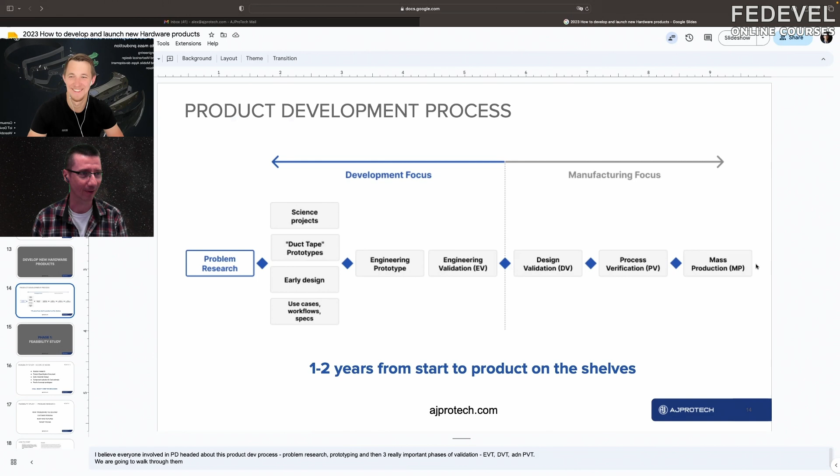Okay, so let's have a closer look on this point. Let's start with how you start. So once you're early in the process, you start with problem research. What problem are you solving? What existing components or products are already solving that problem, and how do they do it? You look at the pricing. You really want to dive into competitors before you start engineering, so you understand who you're up against.

Next phase is really critical. I think the most critical part in the entire process is to have a real clear product specification document. It's a requirement sheet outlining everything about your product that you need to know. This is going to be a live document which will be evolving, but at the end, your product must comply with that PRD. I have a few templates which we can share in the next few slides, so just keep that in mind—your PRD should be there.

If I can just say what's the difference between the successful launches and the not successful ones, those who made it usually had the requirements built from the start.

So basically, I would like to point out your company also does this complete design and manufacturing process. So when you have clients, they will deliver to you this kind of document, and based on these documents, you then design all the boards and everything.

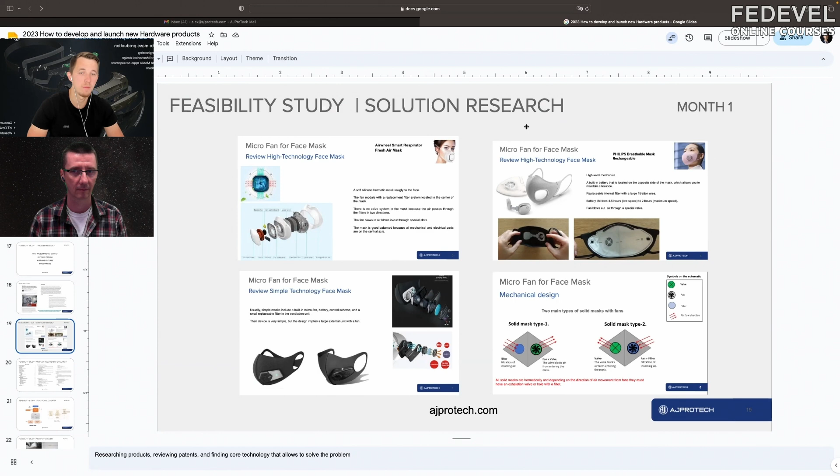When you research solutions for similar products, you'll see the must-haves that competitors have—certain battery life, certain pricing. So you do your research before building your specs, then start working on specification. A good specification depends on product size—for something really big, it can be up to 20 pages; for something relatively small like a consumer electronic product, it's usually around 5 pages. Don't try to make it perfect, it won't be in any way—somewhere between 2 and 5 pages is a good starting point.

You have to define what the must-haves are for you, and those must-haves must keep evolving—you might be adding to them. For example, temperature range and humidity are important. If you have certain functionality requests, for example a product with connectivity, you might want to include how often it needs to send data to your mobile device through Bluetooth. Battery life is also important.

So here, you don't think about how to get it, you think about what you need to get. So solutions—it's not going to be super detailed. It doesn't go into component stuff or something. Just the features and really important requirements.

Better than what is already available. You definitely don't want to be worse. You want to be better. Okay, that is correct. What comes first?

Solution comes second. Here you just define what you need to get, and you come to the how to get, to the specs, at the next phase when you select components and start making prototypes. Don't try to use this accelerometer or this microprocessor in the specs, because that's a path where you restrain yourself too early. Okay, and this is the PRD, product requirement document, because you used this a couple of times, so I wasn't sure what it means.

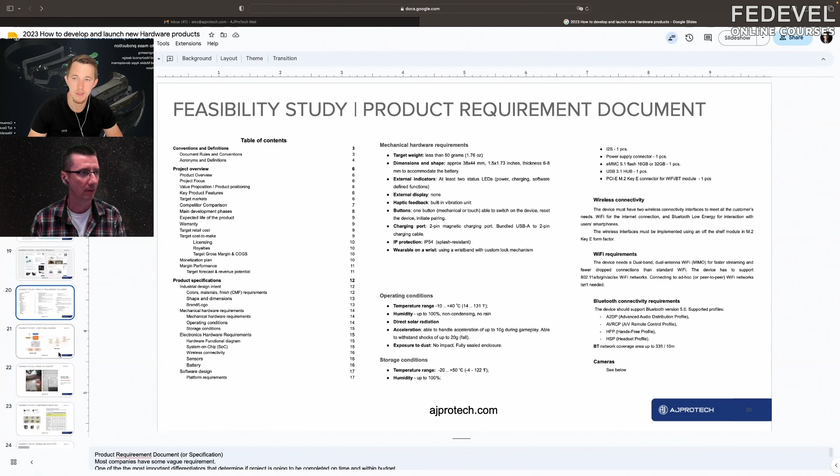Okay, yes. So one of the next phases is when you start experimenting with development kits, getting those evaluation boards. My biggest recommendation, and don't quote me here, but we're highly against using regular hobby prototyping things like Arduino or Raspberry Pis. Can we talk about this a little bit?

Yeah, okay, absolutely, so say why. It's very early in the process. A lot of companies start making their prototypes on Arduinos or Raspberry Pis, and they have to go change it completely once it comes to production, because neither Arduino nor Raspberry Pi are production friendly. Supply chain availability and integration into final product reliability is just not there. If you really want to build a successful product manufactured at scale, you have to use components which are production friendly. So if you want to save yourself a few months or more of time, our recommendation is always to start with evaluation boards. Some of them can even be programmed in an Arduino IDE, but it's just so much faster taking you to production if you use those more production-friendly evaluation boards.

This is interesting because, for example, when I was playing with some ideas, I often use something like ESP32, especially because it's wireless, it's Bluetooth, it has so much code on the internet. In a couple of hours I can build something, whereas if I take a standard evaluation board, it can take weeks to build it. With this kind of board, I can put everything together in hours, really in hours. I was very surprised how easy you can create a web server on ESP32 and control or access data on the board.

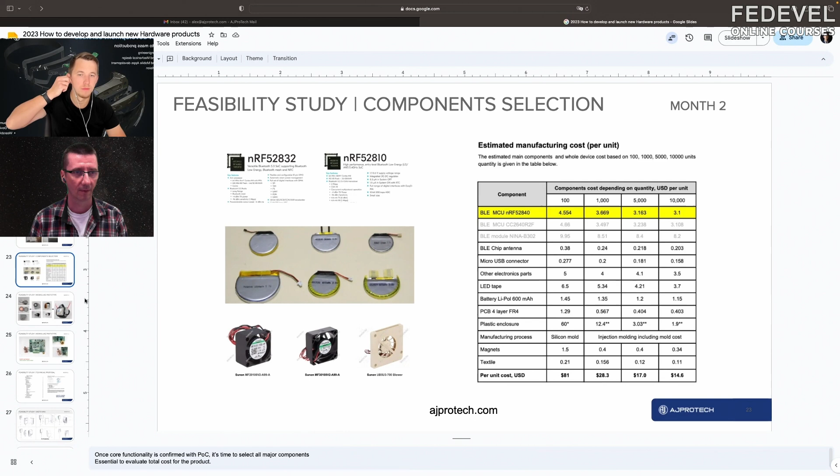Very often when I do this kind of calculation, I kind of ignore the price for 100 pieces, because 1,000 is where there's a big difference. So I just don't really calculate with 100 pieces or tens of pieces, because that price is going to be very different from the production price. That is true. Okay, I think we can go next.

Just really briefly, once you're trying to make it work, you use 3D printers a lot, you use rapid prototyping a lot. At this stage, you don't try to be pretty, you're just trying to make it work. This is an example of a wearable fan, a mask with a fan, just to keep you breathing easier. So just trying to make it work - this can be done in a matter of hours, sometimes within days. You don't spend too much time there.

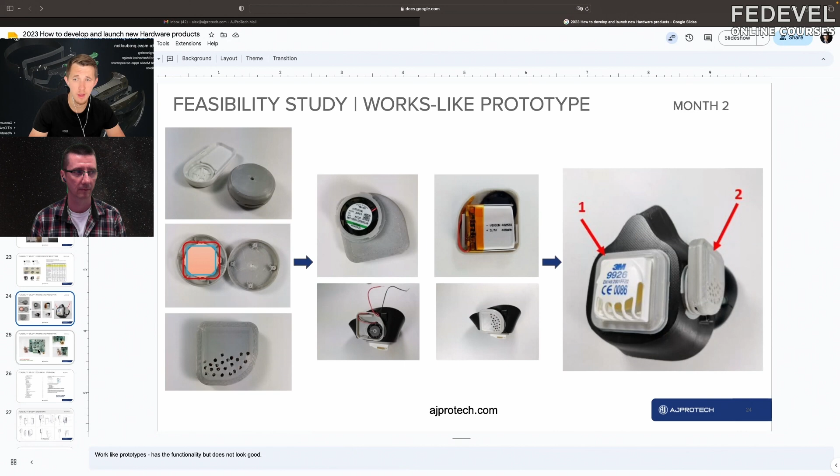On the electronic side, it's okay to use evaluation boards, it's okay to use breadboard prototypes, it's okay to use wiring - that's how you prototype things quickly. Don't try to make the custom board when you can just take some wires and a breadboard and make it work. Very often it may even be cheaper. Sometimes I've seen first prototypes or tens of boards built from boards you can buy, because it's super cheap compared to trying to design it, build it, and then find out you have to redesign it because you forgot something.

That is true. So custom boards come once you already know a lot about your product, your cost, the functionality, and the chips you want. Even though getting PCBAs these days is fast - sometimes in a week, sometimes in 2 weeks - it's still 2 weeks. You can get a lot done in a matter of hours if you use development kits and some wiring. So be an expert in wiring at this stage, just make it work.

Next part is once you validate your components - remember we talked about the PRD requirement document, that is what we're trying to solve. This technical proposal is how we're solving it. So when we know we need our battery to work for 10 hours, at this stage we calculate what battery capacity we need and what battery you might be using. If you have, for example, another Bluetooth chip, you might put a few options - that's how you're trying to solve it.

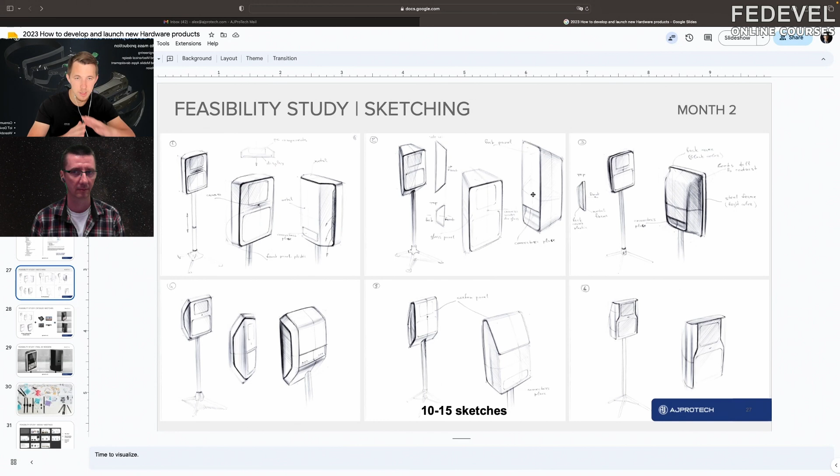Is it going to be round? Is it going to be square? Is it going to be a cylinder? Then you narrow down to anywhere from two to four options, go into the next phase, and start picking components which are going to go in there. At the end you have one or two designs that look somewhat like a product. They are more or less renders at this phase, but you know that you integrate all those displays, cameras, memory components.

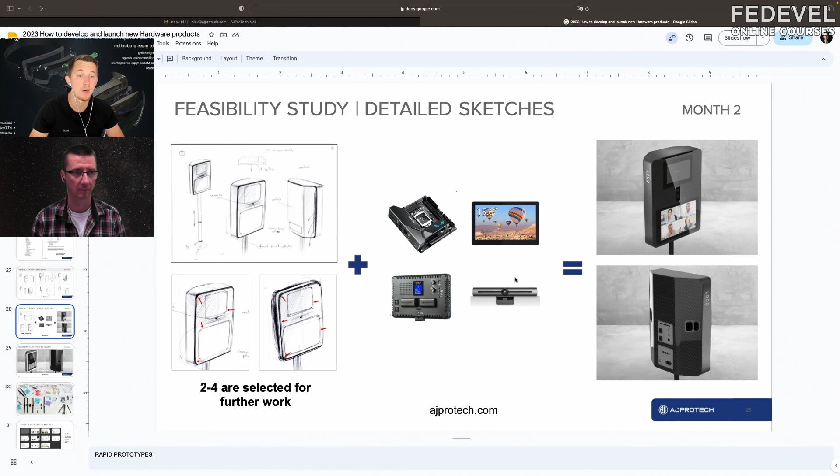This is one example of the consumer electronic products we were working on during the pandemic. Very rapidly, we went from just an idea in our head to the render. That render was actually with actual parts built in. So at the end we have something like this, 3D renders, so you can show your potential investors, friends, and clients to get them excited. You have something working in your lab on those evaluation boards, but you also have something to show people, to get them excited about the product.

I completely agree. I remember when these softwares like Altium Designer started supporting 3D views. Yes, that was so great, because at a very early stage you could show your clients and managers how the board was going to look. Otherwise they had to wait for months. I completely echo that. Yeah, that was a great time, right Robert? Yeah, exactly.

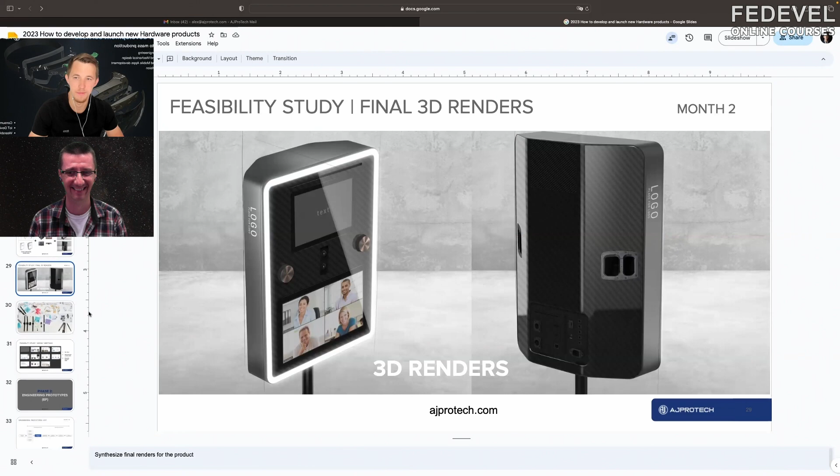Okay, and you need to be sure you will fit everything inside of this. All right, okay, moving on.

So you have an idea about your design, how it might look. The next phase is to actually start working on your custom prototypes. Remember this timeframe, I'm going to be going back to this one a lot. We start working on the custom engineering prototypes, solving the core problems, validating all the components. There is no tooling, no cost optimization, and the unit cost is going to be high. This is the time when first-time customers can fully understand the product, and probably the best time to raise money from investors. You use rapid methods to build only a few prototypes, somewhere around 5 to 10. The goal here at the end is that your engineering samples meet your specification. Remember those specs we built? This is the time to meet those specs.

How do you usually do this one? This is a product we've been working on for quite some time, and I'm going to show you how the PCBs evolve over time. Your very first proof of concept might just be wires connected to those contact plates on the device. It can be done in a matter of a couple of days.

The next phase, another proof of concept, is when you start making it a little bit more reliable, so your wires don't disappear from the design. You use some magnets, some glue, and it's still looking very ugly, but it's a bit more reliable. Then you build the board in a bigger enclosure. You're not trying to miniaturize it too soon, you work with a bigger board just to validate everything.

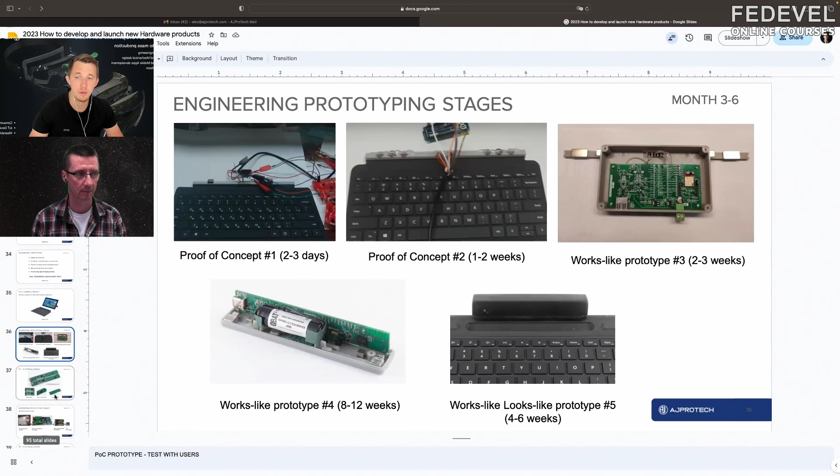Okay, so the last picture. Your first prototype is working, you definitely find some changes. We have some wires, we have some jumpers, and then you do one more iteration to eliminate all those and make it work, and design a simple enclosure. So at the end, you have a looks-like prototype which is working as a product, looking somewhat as a product, and you can go to the next phase.

A few tips on what to expect at this phase. A few recommendations: you can expect anywhere from 2 to 3 iterations of PCB design during your engineering prototyping. On all those designs, you want to add test points. This is not the time to cut them off or try to make it too small. Have a lot of test points - they're essential at this phase because you test your product with those.

Another decision to make is whether you want to use a PCB antenna or a chip antenna. If your cost allows you to use a chip antenna, that's usually best, because you don't have to spend time tuning the antenna. And finally, if you can make your board single-sided, that's usually best for cost. So whenever we have a chance, we use a board where all components are on a single side. That's better for manufacturability, because only one side is assembled, and it can save some money.

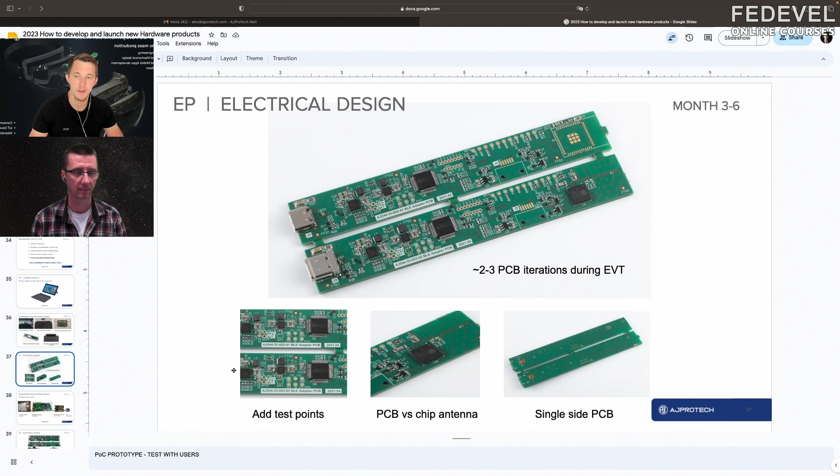One more example - this was the wearable sports tracker, how we came from evaluation boards to a working prototype, to another working prototype, and then to final engineering prototypes. So you add complexity gradually, you don't try to miniaturize it too soon. You work with evaluation boards, then you get a custom board in a bigger form factor, you validate everything on it, and then once your schematic is proven, you go to a small custom board.

This is interesting because sometimes actually I try to design even the very first board into the size the final product is going to be, because sometimes I would like to know if it's actually going to fit. Yes.

But yeah, I think this may be also different between people, what they prefer. But definitely if designing the prototype to fit into the final product is going to cost much more time or money, then it's probably fastest to just make a big simple board as quickly as possible and test everything on this board, because sometimes you would like to maybe test more circuits, different circuits or different chips, and compare the results. Maybe that could be also a reason.

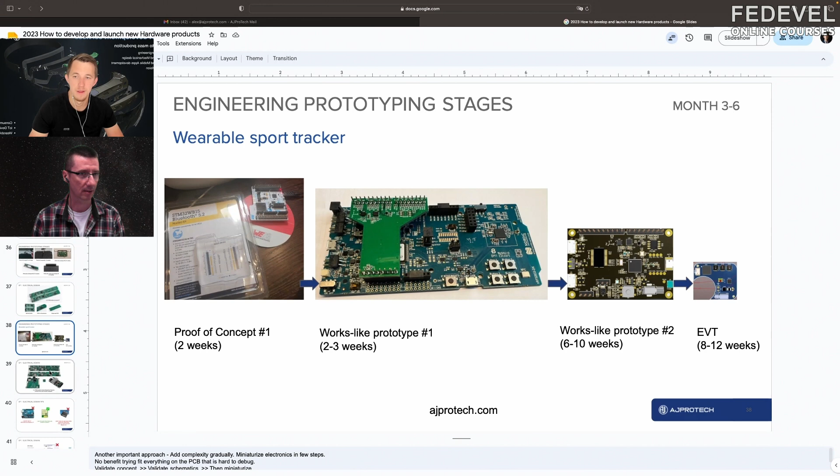Okay, we can move to the next slide. At this phase, some wiring is acceptable - as long as it works, it's acceptable. So patch boards are also okay.

Few recommendations, few actual design tips. It's much better to use components which can be used eventually on a product. Raspberry Pis and Arduinos are definitely not production friendly when you scale up.

We recommend using pre-certified modules whenever possible, like ESP32s and others, or Nordic ones, that are pre-certified with antenna. So you save yourself quite a bit of money and time on compliance. This is very important, on the FCC.

Using chips from big guys like Qualcomm, MediaTek, Realtek. You look at the product, like you want to build another iPhone, you look at the product, they use Qualcomm, so I'm going to use Qualcomm. You get the data sheet, you start working on this one, and then you're trying to get some support. You reach Qualcomm, and they don't reply to you.

You know, been there. I have not really been so far, but I see many people writing about this, like they use Realtek, for example, Realtek chips, and they say, oh, they never answer. Yes.

Realtek is, I think, one of the chip manufacturers which I actually wanted to use in one of my products, and this is what happened. But usually then I was careful. After this happened to me, I knew don't use this.

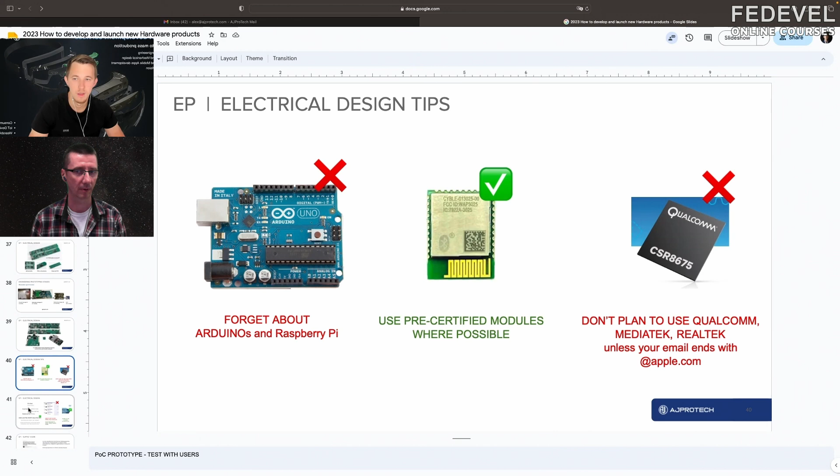Completely agree. Moving forward, check lead times prior to selecting parts. It might be very intuitive, but some of us really skip this part. Before you say this part is great, I'm going to be using this one, check stock and lead time. Lead time for some chips might be a couple of years, for some even more.

So be careful with selecting the parts, and if you can afford using a sourcing agent, get not just the immediate price but the lead time and pricing if you order through the regular production process. We use sourcing agents in China and Asia to check those parts directly with manufacturers, so we know what to expect.

I would like to point this out also, because I have so many stories about component selection. I remember when I finished university, I got this task from a manager: design a board. I found a chip and it was doing exactly what I needed. So they sent me 5 samples, and then I never heard about them anymore when I wanted to produce the board.

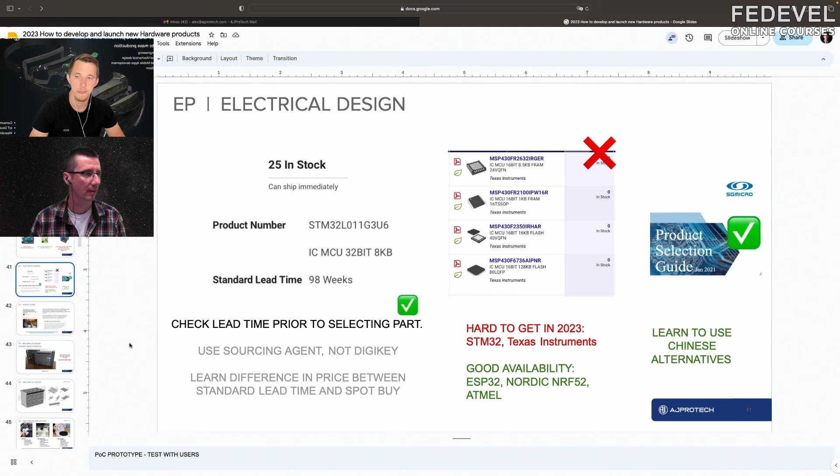Moving on, mechanical design. Mechanical parts are expensive because they require tooling, and tooling is a fixed expense. You pay regardless of your volume, whether you want to make a few, a few dozen, a few hundred, or a few thousand - you pay the same tooling cost. So mechanical design must be done right.

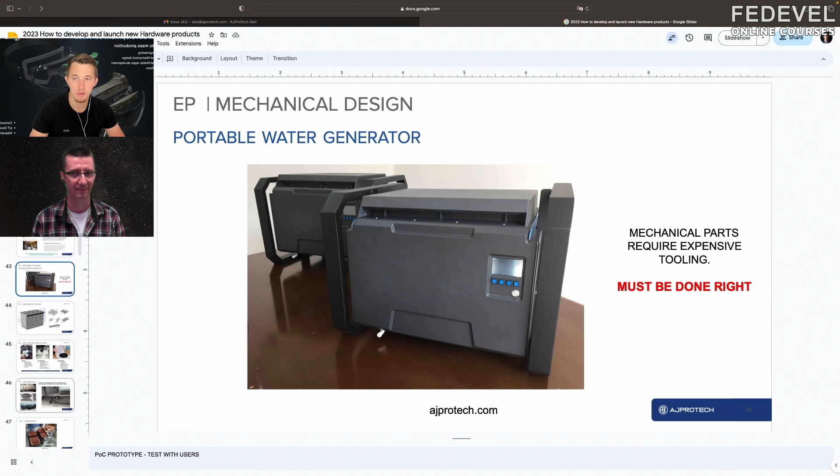For every product, you must be thinking about your mechanical design. If you have some mechanical background, you can do it yourself or hire someone. Just be aware that any mistake you make in the mechanical design is going to cost you substantially, because those changes don't come cheap.

So when you do your mechanical design, try to split your big structures into smaller pieces. Don't try to make those solid three-dimensional pieces. Split your structure into a few smaller pieces, which can be easily manufactured either from sheet metal, sheet plastic, or some complex molding.

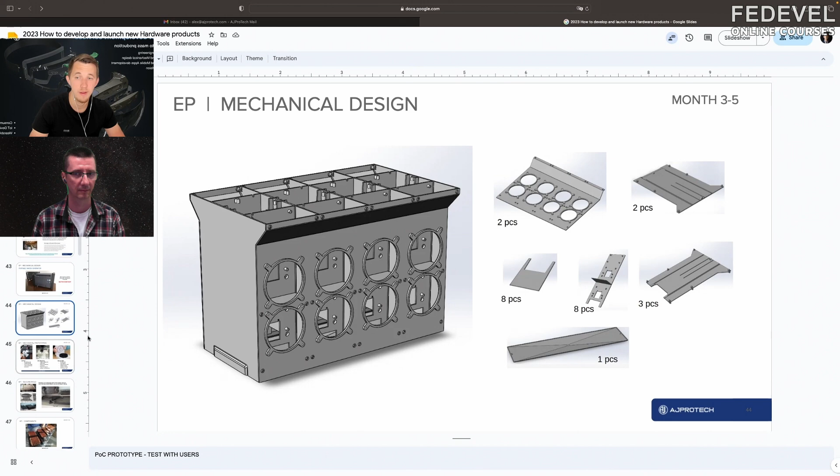One of the big things I'm going to show you is one of the methods to actually prototype mechanical designs. So we all know 3D prints - no startup cost, cheap and fast, can do any shape, but it's not as good on mechanical properties.

A slightly better option is CNC machining, when you get a big block of plastic and you just CNC machine your part from that. It gives you a great look on the product, much better mechanically, much more robust. The downside is it costs quite a bit, because if your product is substantial in size, it may take a couple of days to CNC machine that from the piece of plastic.

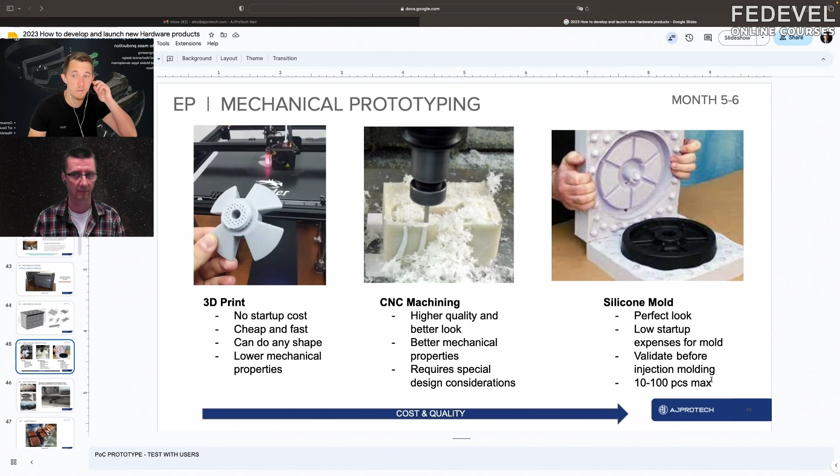One thing we use a lot is called silicone mold. It's similar to injection mold, but at much lower cost. The way you do that: you 3D print or CNC machine your master model, your sample, and then you make a cavity in a piece of silicone. Similar to injection mold, but instead of metal, you use silicone, and then you can pour melted plastic into those cavities. It gives you a good look. It's not as precise dimension-wise, because silicone can fluctuate a little bit, and those molds don't last as long - they're usually good to produce somewhere between 10 and 100 pieces, maybe.

This is an example of parts we actually made with a silicone mold, for a product which is pretty substantial in size, with a lot of mechanical parts inside. We used silicone mold - we used 3D print and CNC machine to create master models, then created silicone molds for those to produce the samples. The final results look amazing, and it's much cheaper than trying to CNC machine that entire batch of plastic parts from a solid piece of plastic.

Interesting. I didn't know that.

So you have to find a company which will put the melted plastic there. Sometimes you can do it even in-house. We've done some experiments for something small, like wearables, anything less than a smartphone size, we can do in-house without going outside. When we work on something bigger, like this product, we usually go outside with a few vendors we work with to do this.

So there is some kind of special plastic which you somehow melt? Is there something special about how you melt it? It's a similar process. There are a few types of silicone molds. The big part is to make sure you use proper silicone, and then plastic that must be melting at lower temperature, because if you use something like PVC, that requires high temperature which silicone might not be able to hold. So it's a lower temperature plastic, which might have slightly different mechanical properties, but you can still get proper finishing, like matte or glossy, and your surface quality can be really good.

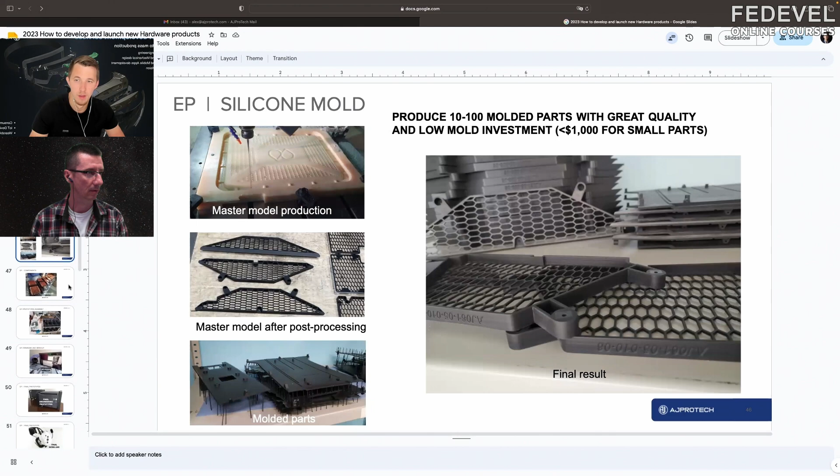So you assemble modules for your units. You do your assembly in-house, you don't want to outsource this. The engineers actually working on the product must be the ones assembling it, so this is really essential. You learn a lot about your product once you assemble it for the first time. So if you do development in-house, assemble it yourself. If someone else is developing for you, a company like ours does assembly only in-house because we want to see every small change we must make for the product to make it manufacturable.

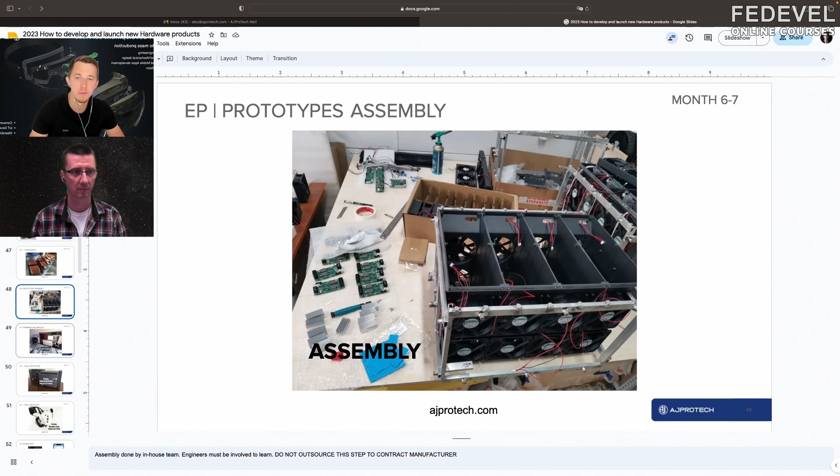Firmware development - it's essential to know how much to expect firmware-wise. You want to allocate at least one-third of your entire time for bring-up and validation. So if it takes you, for example, 3 months to develop something, allocate at least a month to actually test it, to actually make it work. If it's taking you 6 months, 2 months will be a minimum bring-up time. Don't skip that step. Don't say, oh, my PCB from the manufacturer is going to be ready tomorrow. Allocate at least one-third of the time for bring-up and validation.

What kind of validation do you recommend? Because one of the validations I really like is always running tests in environmental chambers for different temperatures. I found so many problems running at low or high temperature, which otherwise would probably appear in just a few percent of customers, but you would never find out if you only tested on your table in the lab.

Yeah, that's a great question. I have a slide about that on the next phase, but I'm going to jump in there and then we're going to come back here.

So once you have your engineering prototypes, you go through engineering validation test, or EVT. The tests you typically run at that phase are functional - making sure all the functions work, power draw, power up, power sequence. Thermal is operation at low temperature, high temperature, thermal cycling, and EMI to see how much EMI your product is actually emitting. Those are the critical minimum. Sometimes you want to spend more time here and test more, but those are the minimum you want to do.

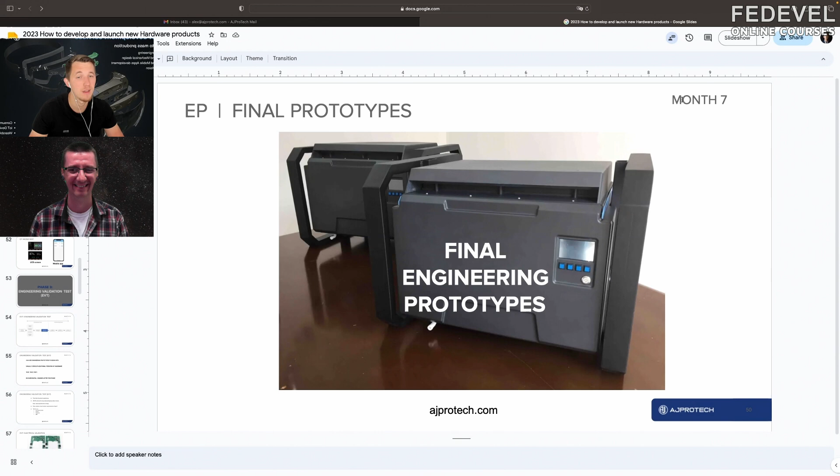Okay, we can go back to that later. So at the end you have final great-looking engineering prototypes, around month 7. It's usually a real timeline, approximately 6 to 7 months to get to this stage, sometimes even longer. If your product requires specific materials, it's okay to make it look slightly different. For example, this part was supposed to use specific plastic which can only be done during injection molding, so we skipped that material and used simpler plastic at this phase, knowing we couldn't get it efficiently without investing in tooling. We got this to work at this level and then went to the next phase to use the proper material.

If you have any software development, it goes in parallel. Don't spend too much time here, don't spend too much money. Make it simple, make it work - as long as it works, it's okay. You can always iterate your software quickly. Don't try to spend more on software than you do on hardware. Software can be updated, yeah. Yes, exactly.

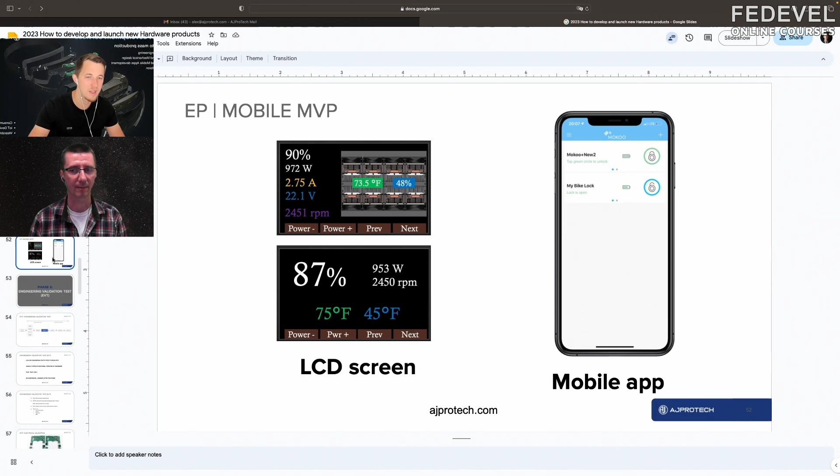All right, EVT, engineering validation. You have your prototypes, they're somewhat working, you're excited, you go through EVT. You can use your first engineering prototypes to begin with. Usually you'll have to develop additional iterations of hardware during this phase. You do testing - EVT is about testing, test. Just be aware there are no substantial changes after this phase, so whatever you find out must be done here. Test for functional, power, thermal, EMI, sometimes more.

If you do build another round of prototyping, it's usually 20 to 50 units, because some of these tests must be destructive. You do power testing, you might destroy your board. You do thermal, you might damage your board. So be prepared to do a bit more units at this phase.

For the very first boards, usually we build like 5 to 10 boards, because from my experience maybe 1/3 of the boards may not work because of low production stuff, like assembly mistakes or something like this. It doesn't even have to be anything wrong with the schematic or PCB - it's just because they built 5 prototypes, there's a very high chance something will be wrong in 2 of them, like a bad contact or something. That is correct - you want some additional units to accommodate manufacturing defects.

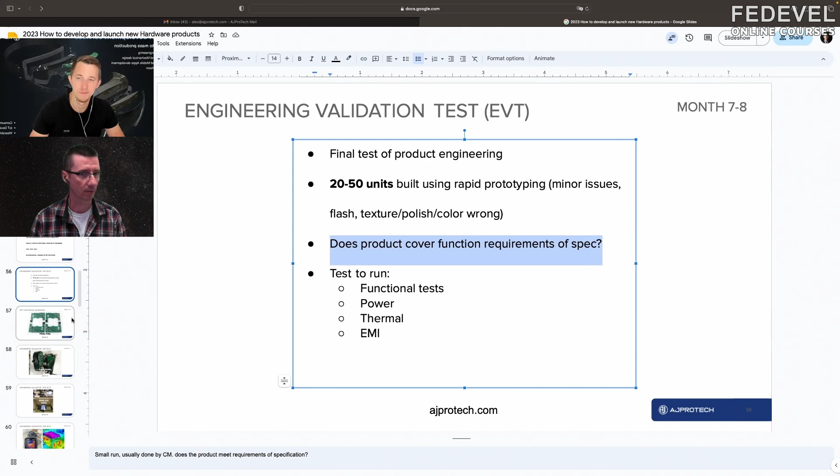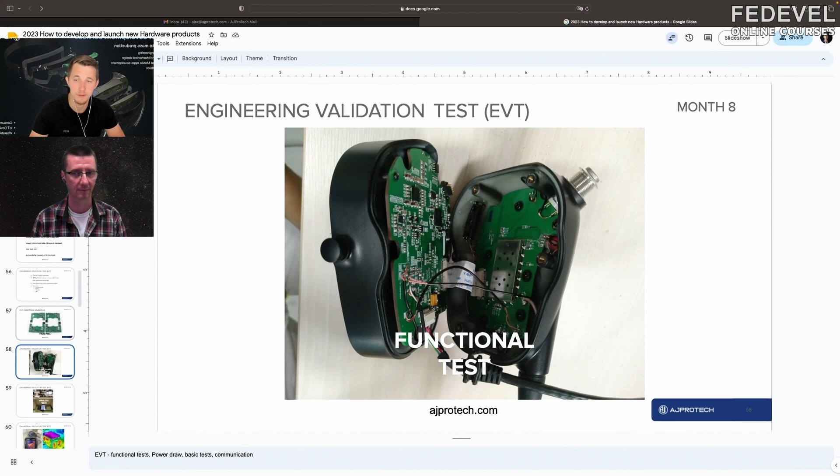Wireless testing - if your product has some sort of wireless connectivity, you can do this early on in your own lab or office, just to see antenna performance, Bluetooth performance, data speed, even before you go to an outside party for formal EMI testing. I remember Bluetooth testing, is it still working? It still works. Yes, you want to spend as much time here as you can to make sure it's working over time.

If it works for 5 minutes, it doesn't mean it's going to work for 10 hours or 24 hours, especially if you put it in the thermal chamber or the cold chamber, or you just vibrate it and move it around. This is a good note, because when we created these first prototypes, we had a couple of them running nonstop for as long as possible, just to be sure they are running reliably.

Some problems may only appear once per days, weeks, or even months, and that's something that should not be happening - that's not good. Endurance testing is critical, especially at the early stage of your R&D. We always took a couple of boards, put them somewhere, and they just kept running forever. We also do that. It's expedited - sometimes if you run it at a higher temperature, a 24-hour test or even a couple weeks of testing at higher temperature can really show you what's going to happen with your product over time. It's called accelerated aging, and it's really helpful.

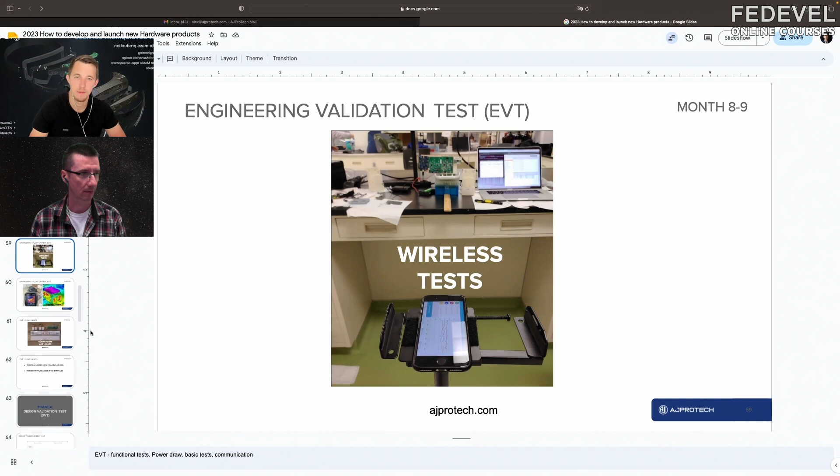Moving on - thermal. If you can invest some money into a thermal camera, it's great. It shows you everything about your product - the temperatures, which part of your PCB gets hot. We have a lot of thermal cameras for different applications. This one is for device-level testing, so we can see how hot the device runs. We have a smaller camera for PCB testing, to really see what parts get hot and might get damaged first, so you can evaluate whether that thermal condition is appropriate.

Also, if someone doesn't have a camera, I always use my fingers. But I recommend there are thermal cameras you can use with smartphones.

They are just plug-in, and much cheaper than standalone cameras. It can be super useful, because you can notice very quickly even one small component which is getting hot and it should not be getting hot.

So you can quickly find out there is probably something wrong with this circuit or component, and you need to fix it. That's correct. And sometimes you can rent that camera for a day. When you're just getting started, 10 years ago we were just renting equipment at a small price per day, not buying it, because we couldn't afford it. Once we got bigger, we purchased all that for our own use.

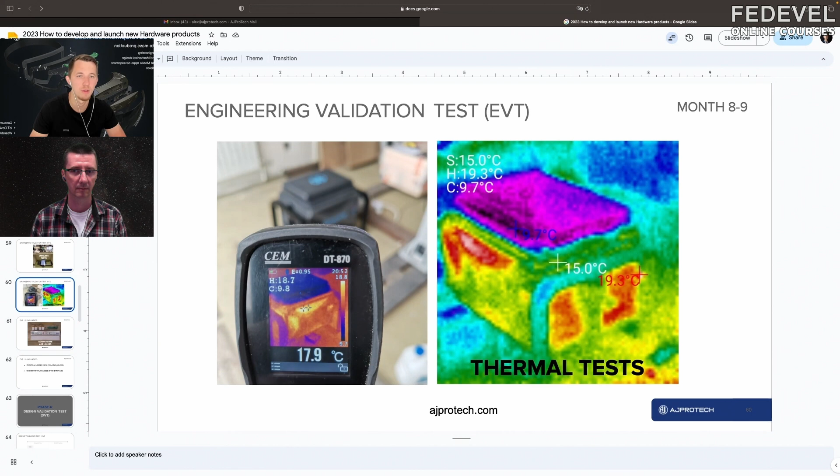So at the end of EVT, all your components are locked. There are no substantial changes after this phase. Everything that must be changed is changing here. If you make a change, you go and test it again. So no substantial component change after this phase.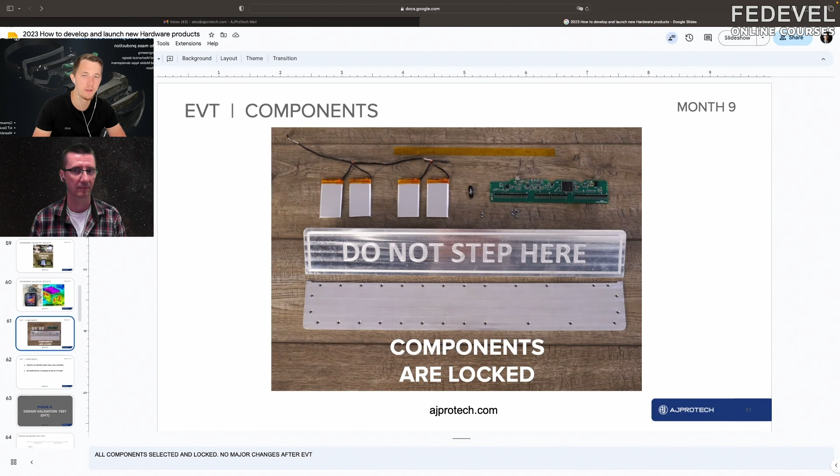You iterate as much as needed. Sometimes you take in a new iteration of PCBs or enclosures. And again, no substantial changes after EVT phase. This is the end of your engineering. Then focus shifts to production.

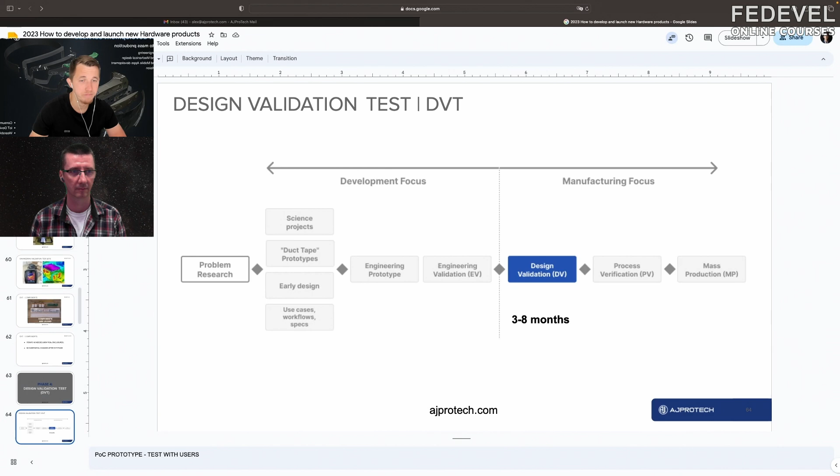Design validation test is a time when you start talking to the manufacturer. Depending on your product, how fast you are, how experienced you are, how good your manufacturer is, it can be anywhere from 3 to 8 months, sometimes even longer. So focus shifts to production in this phase.

So what to expect? It's the final validation before start of production. Here you start selecting a contract manufacturer. I'm going to share a few tips on how to select one. You do design for manufacturing optimization with your contract manufacturer. Your electronics is final, so all tests are completed, and you work on software optimization if that wasn't done before.

Usually at the end of DVT you do tooling, so all your prototypes are built with tooling. This is when you start investing more into your tooling and manufacturing, especially for plastic and mechanical parts. The question you answer at the end: does your product meet all requirements - functional, cosmetic, and environmental? So complete validation. And again, it can be anywhere from 3 to 8 months, with 4 to 5 months being the average.

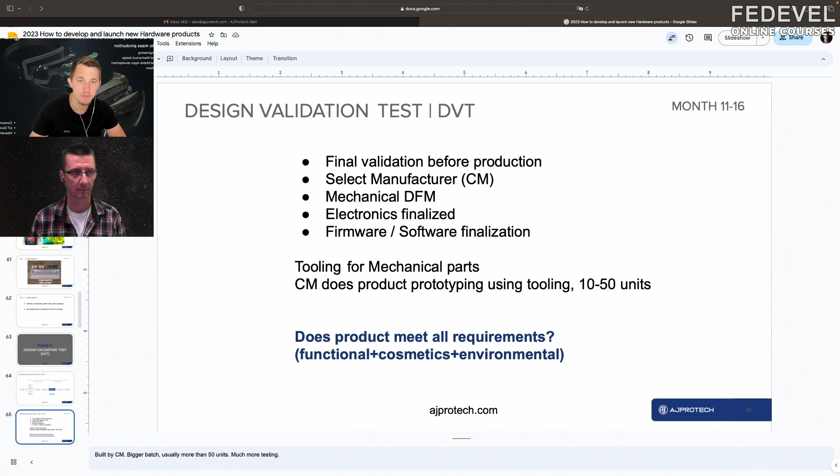Let's talk about the fun part, how to select the manufacturer for your product. Shall we? Yeah, definitely. I think many people will be interested to know this, because even if you find one, from my experience, we have changed a number of them.

You start, it's like when you pick a school or a job, you compile a list of possible manufacturers to work with. It can be anywhere from 10 to 12 CMs to investigate. You might go to sites like Alibaba or other Chinese sites if you are manufacturing in China - you have to go where they are. A great place to find those factories is Alibaba. You get a list of 10 to 12 factories which are somewhat in a similar area.

If your product is, for example, a wearable device, you want to work with a factory who is doing some wearables. If you're doing another like industrial product, work with someone who is doing industrial devices. Having a manufacturer who's done similar products before is essential, because they might have an established supply chain which will work better for your product, and they might have testing equipment for your product. So a good CM can save you quite a bit of time and money because they've done it before and they can guide you. CM is your partner, not your employee, so just keep that in mind.

From those 10 to 12 CMs, you look at their portfolio, their references, ask for references, ask for the products they've done. If you can, try to talk to those clients they mentioned. Have they sold anything to North America or Europe? Try to contact those companies and ask them what their experience was working with this factory. Are you satisfied? Good factories will be glad to share references, because the clients can say good words about them. So approximately up to 5 factories.

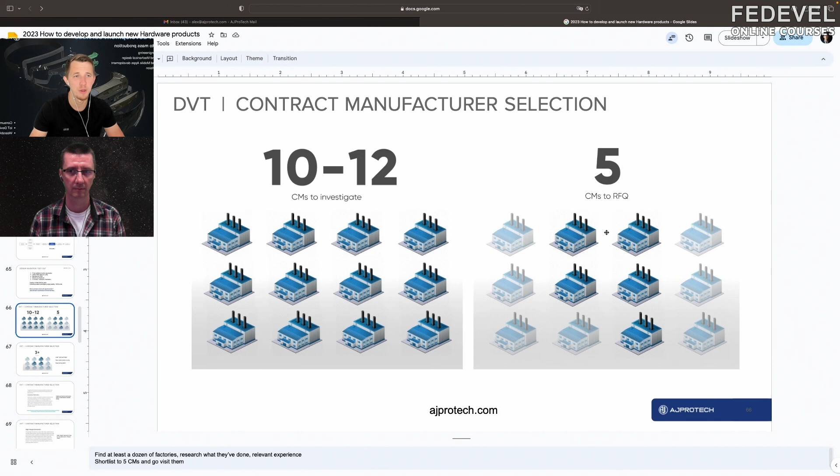And don't try to select solely on price - this is my number one recommendation. Never select solely on price. Have a few factories in mind as a backup option. If you have three factories that are great choices, keep that in mind. If something goes south with one of the factories, you can always go to the second one.

So do you manufacture everything in one factory then, or how do you do that? It depends on the product and on your financial abilities. If you're small, if you're just getting started, working with one factory is definitely going to be a more cost-efficient option - they'll use their supply chain and resources to put everything in place.

If you're getting bigger, or have the potential to be bigger, it's okay to use mechanical manufacturing in one factory, electrical in another factory, and assembly in a third one.

Sometimes one of our best recommendations, if you really want to be protective of your IP, is don't give the final firmware or programming files to the factory. Give them something small, just enough to do some functional testing. They can program that version at their own factory to test it. And when it lands in your country, you can put the final firmware on through a wireless update.

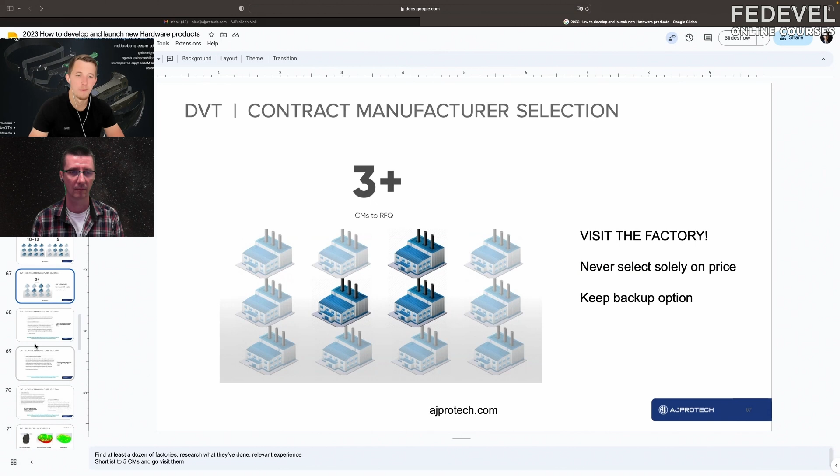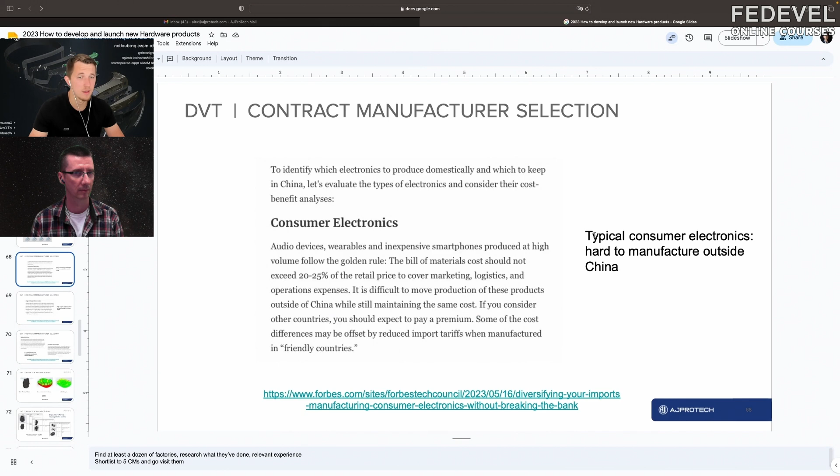If you want to read more about selecting the factory and where you can manufacture, there's a reference article published on Forbes. Consumer electronics is done in China. Higher margin electronics is done in Taiwan, Japan, and sometimes Europe or US. If you're manufacturing something medical, aerospace, or military, that can be done domestically. We're in the US, so we see a lot of our clients manufacture medical and aerospace products in the US.

Let's talk about how we work with the factory. DFM, design for manufacturing: you have a product, it's working great, you send it to the factory, and they respond with a 50 page PDF or Excel saying this angle must be changed.

This is just a few things you must have ready for CFM, color finished material. If you say white or gray, you must have an explicit color code. If you say it's going to be glossy, specify how glossy. If you specify the material, it shouldn't be just plastic, it should be plastic of a certain rigidity. Be very specific with your request, because if you specifically request something, you're going to get what you actually asked for.

For mechanical engineers out there, use constant material thickness. If your entire product is the same thickness, it's going to be better produced during molding, and use draft angles to help your product come out of the mold. The CM is going to drive this: you send it to them, they give you recommendations, and you make changes, or they do it for you.

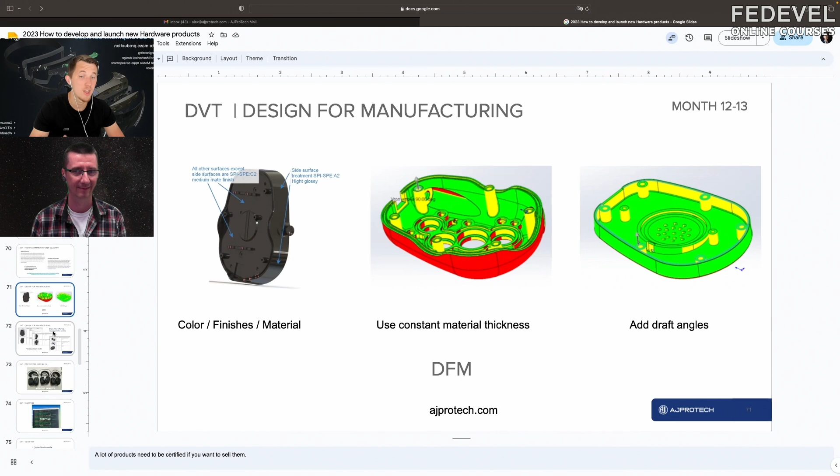A lot of things can go wrong during mechanical design, so you want to work with someone who's done it before. That's where experience pays off. You can only learn those things after making 10 or 15 or 20 products. Even my mechanical engineers, who've been doing it for 10 plus years, some for 20 years, when we send files to the factory, it always comes back with 'can we make this change?' Because each factory uses slightly different machines and the capabilities might be slightly different. So you always adjust for the specific machine, and it's okay to make changes here. It's expected.

Excel or PowerPoint is the language of the factory. Regardless how well you speak English or how well you talk on the phone, none of the questions are solved on a Zoom call. You talk Excel, you talk PowerPoint. You make a screenshot. This is exactly what I receive from Chinese companies: a picture, then columns, then some text translated from an engineer into English. That's how it works.

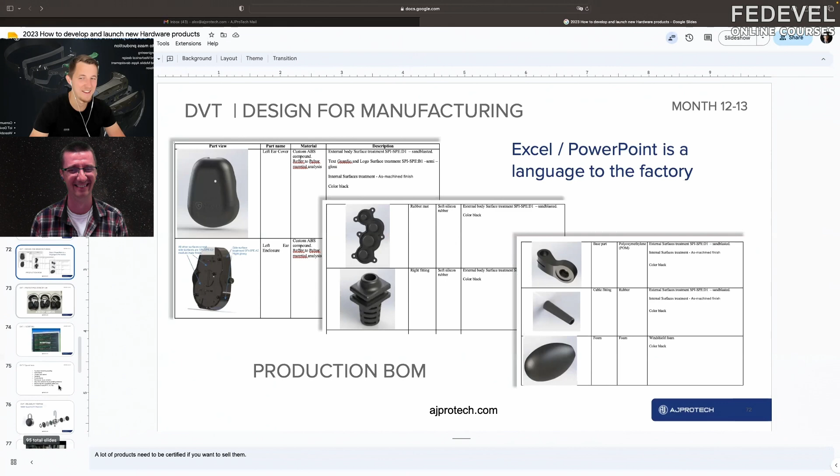At the end, after going through this whole path with the manufacturer and doing the DFM, you pay them for tooling, which can be tens of thousands of dollars for mechanical parts. They produce 10 to 50 units depending on your request, sometimes more. They're looking good, so you can show them at trade shows or to your investors. These are good looking units which we call pre-production samples.

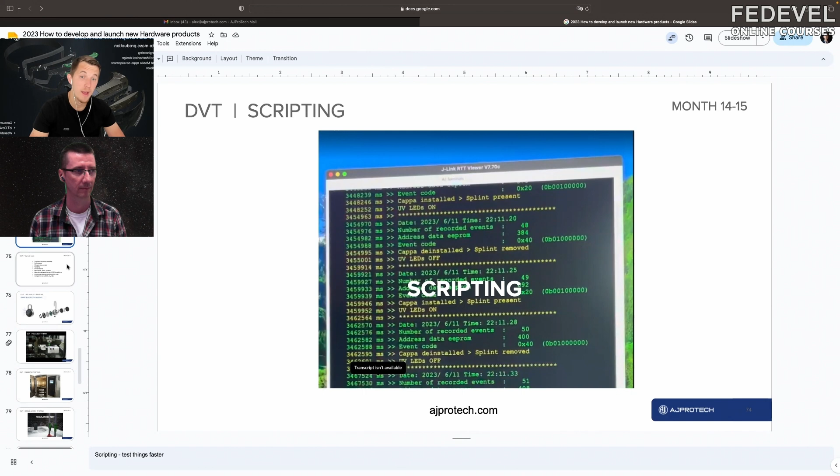At the end, the factory starts doing things like scripting, for example how they're going to test the product once it goes into production. They don't test them one by one manually; they do some scripting to record the events going on with the product and automate testing procedures.

This is exactly what I kept in mind, because it's a big topic many people forget about. If you go to mass production, you don't only design your product, you also may need to design the test to test your product. I guess that's what we're going to talk about right now.

At the end of DVT, you still do some things manually, and then at the next phase you do automatic equipment. Essential things to test during DVT: functional - every single function in the design, regardless how big or small, must be tested at this stage. Performance - how well your machine runs, how your sound is performing, how well your wireless connectivity works, everything. Climatic - hot, cold, mid-range operation. Reliability - as we mentioned, endurance testing, putting it through continuous operation for hours and hours, sometimes weeks at a time.

Environmental testing, to test in different air pressure, humidity. Sometimes we all know we must test in different temperatures, but very little of us actually test our products in high humidity, which might be even bigger risk for the product, because condensation might happen inside the device, and that might be disaster for some of the boards. So really spend time here too. The CM is going to tell you that they can do this test, and they'll just charge you extra to do all this testing, but this really pays off before you invest much into manufacturing of your product.

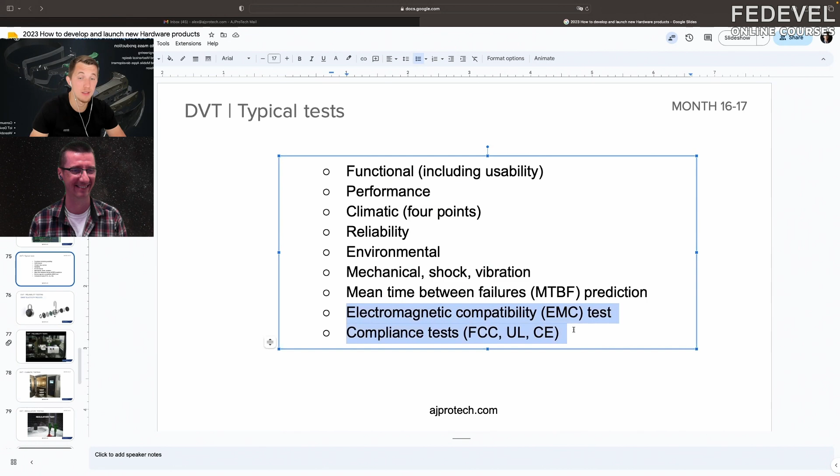And the last few things: EMC test. Every product that wants to be sold in Europe or in the US must be safe from EMI. So the factory does tests. A good factory can do preliminary tests in-house before they send it out to the third-party lab, but eventually it's going to go through compliant labs to do your FCC, UL, CE testing. This is the part where it gets expensive - some of those tests can run you tens of thousands of dollars each.

So you really want to, the way I structure this, know how you're going to be selling your product. If you sell direct to consumer, you only need to make sure it is safe and do some very minimal testing - for example, FCC must be done. If you're selling through big box retailers, Amazon or others, they're going to be more demanding and require UL or CE. So if you can, delay that compliance before you ramp up your volume, that's great, because your costs really stack up quite substantially. You pay for development, you pay for tooling, you pay for the factory, and if you also need to stack those testing fees, it might get expensive. Just be aware that they're going to be there - you'll have to pay them at some point. You can just try to delay it a little bit further down the line.

Okay, I would like to point out ESD test. Maybe I would like to also add here - I know in performance this may be included also, but very often when we design processor boards, we run burn-in tests. That's something which is not normal condition, it's very high power condition for a very long time.

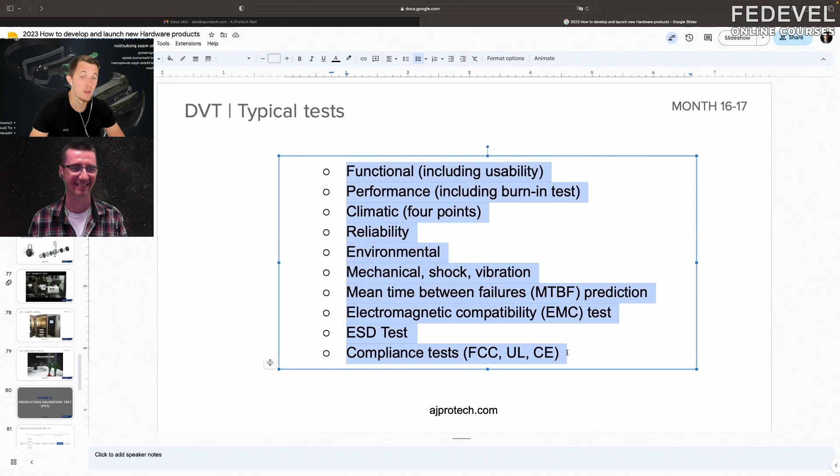You can pick and choose, and you can always ask their opinion - a good factory doing similar products already has those. For example, environmental tests might be tricky, but if your factory already has a thermal chamber in the facility, they can do it for you in a matter of hours. Same for mechanical vibration - trying to do that in your own lab is tricky, but since the factory already has this equipment from doing it for other clients, they can use the same machinery for you.

We often find someone local to do these tests because it's not something you need every day, and it's basically cheaper. Just go there for one day, or run it for a couple of days. Vibration maybe for a week or something, I don't know, and environmental chamber testing too.

We used to have one environmental chamber in one of the companies where I was working, and it was running all the time. I just wanted to point out how useful having this environmental chamber can be.

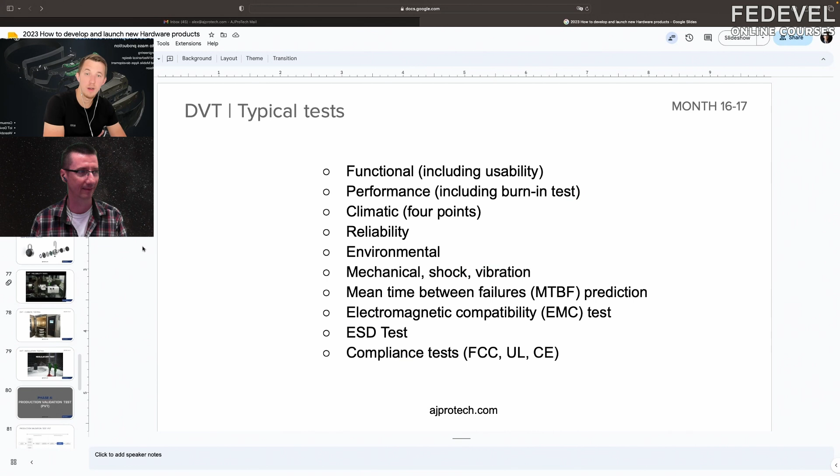So that's about testing you'd expect. Another case study: a smart padlock we did some time ago. At the DVT stage, the factory used an actual machine to test the device - something pressing the buttons and then pulling the shackle, since it's hard to do by hand for the required number of times. So they used the machine to do it for you. Automating some of the testing happens at the DVT phase, especially for one-time testing before you send it to production.

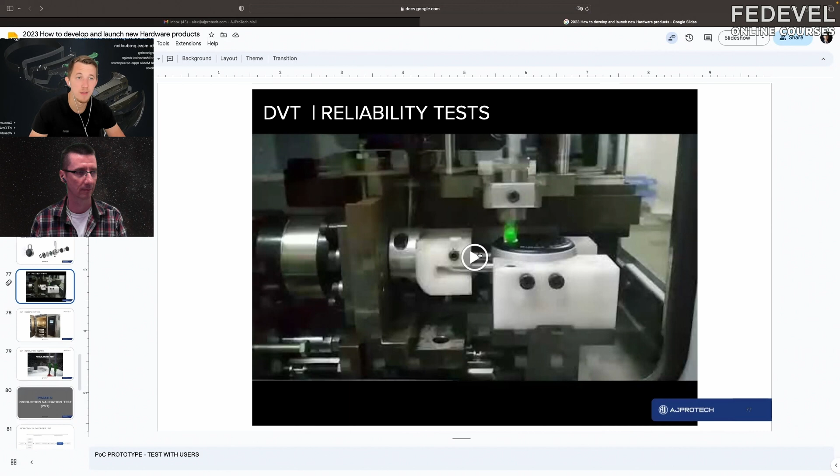As we discussed, environmental testing is probably the most useful test you can do - operating the product at different temperatures, humidities, different profiles. If your product is designed to work at high temperatures, you must do this test because it's the best indication of whether you'll be successful. I think the highlight of using this environmental chamber is that if something is running on the edge of its limits, when you change these temperatures you'll go over those limits and it will fail.

That's why it's useful to have this. I've seen crystals or oscillators failing, memories failing, Ethernet failing - a number of peripherals failing just because we lowered the temperature. Lower temperature was even worse than higher temperature. In higher temperature, usually everything fails when it fails, but in lower temperature I was very surprised - especially for batteries, their performance and capacity drops dramatically.

For that padlock I showed in previous slides, the battery life was more than 12 months under 25 Celsius, normal conditions, 70 Fahrenheit. But once you put it in near-freezing conditions, it was working for only 5 minutes. So we had to go through a lot of iterations of selecting a battery that could actually withstand those lower temperatures. It still won't perform as well as in normal ambient temperature, but at least you know what to expect and can specify it in your requirements.

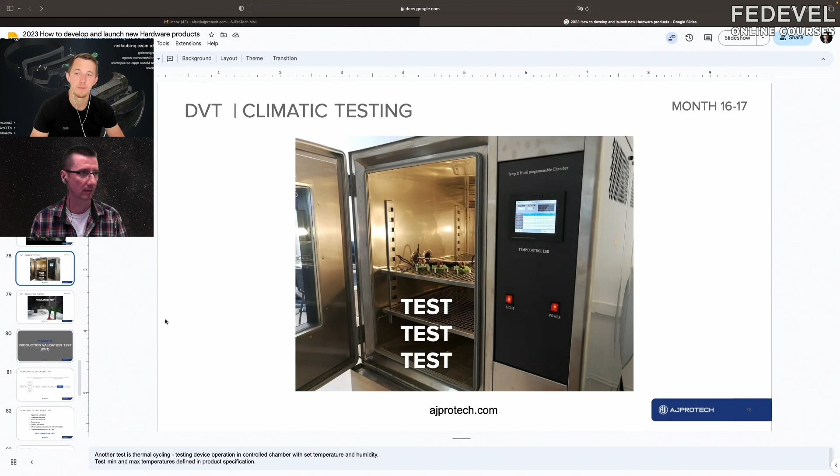Okay, final one is regulatory testing. So all your EMI is tested in a chamber. Usually everyone loves these, it's like black magic, because you get into a room that's like completely nothingness, with antennas everywhere.

So you do this test in-house first at a factory to get some ballpark numbers, to make sure you spend as little as possible on compliance, and then you go to the official certified lab and they do it for you.

If you can do it in China, it's going to be much cheaper. If you do it in the US or in Europe, it's going to be much more. FCC testing can be anywhere from a few thousand somewhere in China to tens of thousands if you do it in the US. The number of iterations depends on your experience designing those products — you fail the test, make a change, go back, fail again, make a change, and eventually pass.

I completely agree. So a recommendation is: don't do this certification before actually running some kind of validation test, because it can cost you a lot of money.

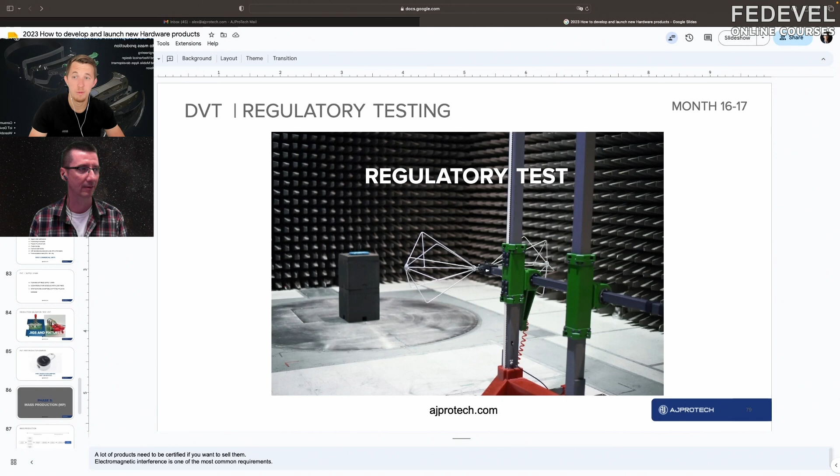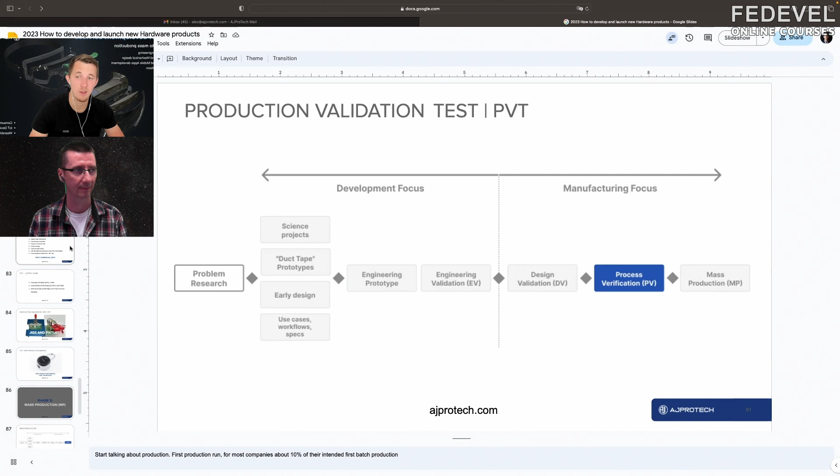All right, so hopefully you passed all those tests and you're ready for the final validation. It's called PVT, or production validation test. The factory drives the effort here — there's almost no development happening. It's just about making sure the factory knows how to manufacture it at scale.

They work with the supply chain on every small component and finalize the tooling on all parts. If it wasn't finalized before, they prepare functional testing — how is it going to be done, how each unit is going to be tested during mass production. They create jigs and fixtures, which I have a slide about.

Afterwards, they do analysis of how many units actually fail, because this is really essential. Let's say your product costs $100 to make, and 2% of them fail and have to be replaced — your real cost is $102 because of that 2% failure. So knowing your yield rate is essential, because it directly affects your cost of goods sold.

At the end of PVT, your factory is usually producing about 10% of your first batch. So if your annual volume is, say, 10,000 units, at the PVT stage they're going to produce around 1,000 units, or 10% of your batch. Final testing must be done at this phase before you start mass production.

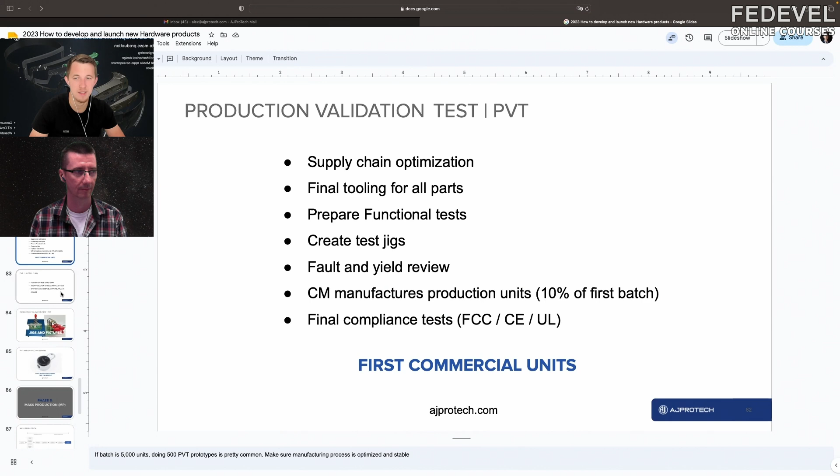You do final compliance testing, and at the end you have your first commercial, sellable, revenue-generating units you can actually sell to your clients, your customers, and your pre-orders. This is the time when it gets exciting — when you realize how difficult it is to sell something. It's real. It's like, oh man, it's real.

So what is the factory doing at this phase? They optimize the supply chain and align your production schedule with lead times. Remember, some products might have a 52-week lead time, some even bigger — that's why it's essential to look at that in advance.

If some of your parts have a 52-week lead time and you only realize this now, your production is going to be 52 weeks later. So what we recommend is, if a critical part has a long lead time, pre-order it early, so by month 15 or 16 you already have those parts coming to you instead of waiting another year.

Spot buys, when you buy from DigiKey or local distributors, are acceptable. They might be higher priced compared to buying from the manufacturer, but if you cannot ship your product without that specific part, it's okay to spot buy — meaning buying right here, right now at a higher price, and planning your next run with a manufacturer lead time.

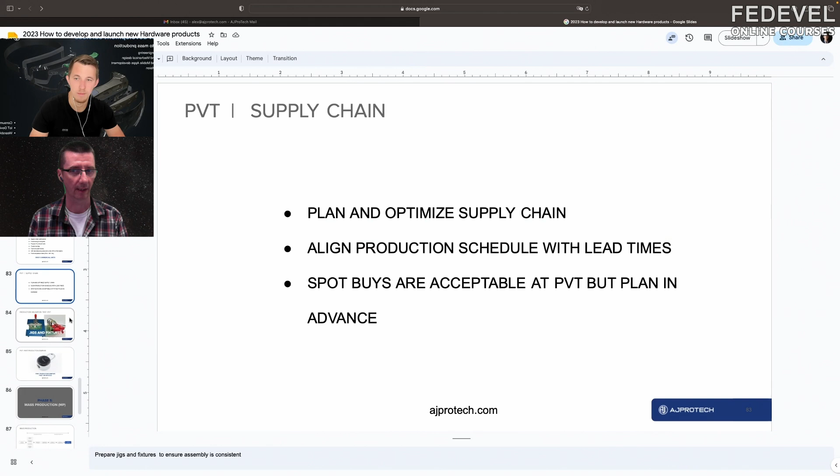Final one is jigs and fixtures. It's an additional layer of work that must be done — how each board is programmed, how each board is tested. These are called jigs and fixtures. They're really inexpensive equipment, but they save you quite a lot of money in testing.

It should be automated — you press one button, pull one lever, and the board goes through all the testing and gives you pass or fail. The more you can automate, the less you pay per unit. This is basically what mass production is: a unit comes from the production floor, goes through the fixture, gives you pass or fail, and you ship it.

That's what's considered to be mass production. If you have to do a lot of manual operation, that's still semi-mass production.

That's what I meant when I mentioned that when you finish your product design, you also have to design the test. Some of these tests actually require designing another board and writing another software, so it's kind of a product itself. And the higher quantities you deliver, the more complex this test is going to be.

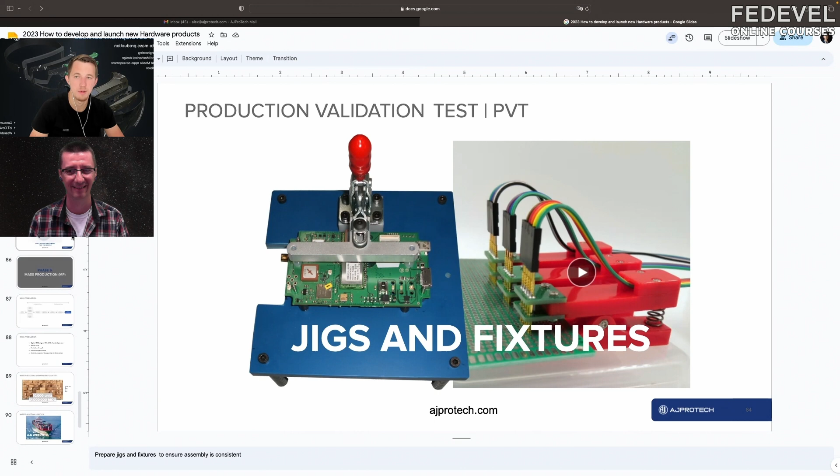That is correct. And finally, at the end, you have your first production samples, which can actually be sold. Once that is done, the factory can be on its own, manufacturing your product.

Mass production - let me give you a number to keep in the back of your head. Typical expected order quantity per year at a good CM is $1 million worth of product every year. So if your bill of materials is $100, they would expect you to manufacture at least 10,000 units a year, coming up to a total of $1 million of product going for a year. Smaller factories might have a lower MOQ, but the good factories always start with this number.

Some of them are even higher. So when you think, oh, I'm making 1,000 units of a product which is like $5, keep in mind that while that's good for a small factory, for a big manufacturer it is below the target.

Because I guess they make some kind of percentage from this turnover, and if your turnover is only $1,000, they're not going to make any money on it. But it depends, because sometimes manufacturers will charge you for the time of the people doing tests or handling your product.

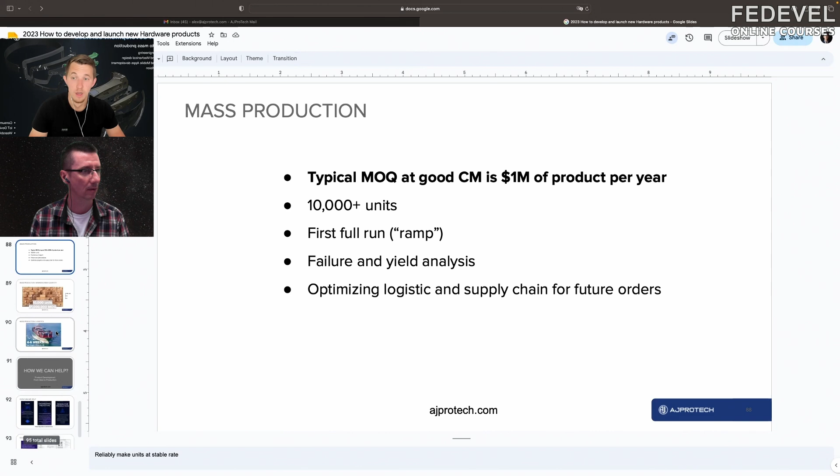Right. Shipping - usually by sea, you can expect anywhere from 4 to 6 weeks shipping time. It's getting better. During COVID this was a disaster because shipping containers were costing 3 to 5 times more than before. Right now it's coming back to normal.

Right now, you always air ship your first batch, but then you try to use sea shipping to cut down the cost of your logistics, shipping from China to the US or Europe - and customs, about 6 weeks, plus duties and VAT.

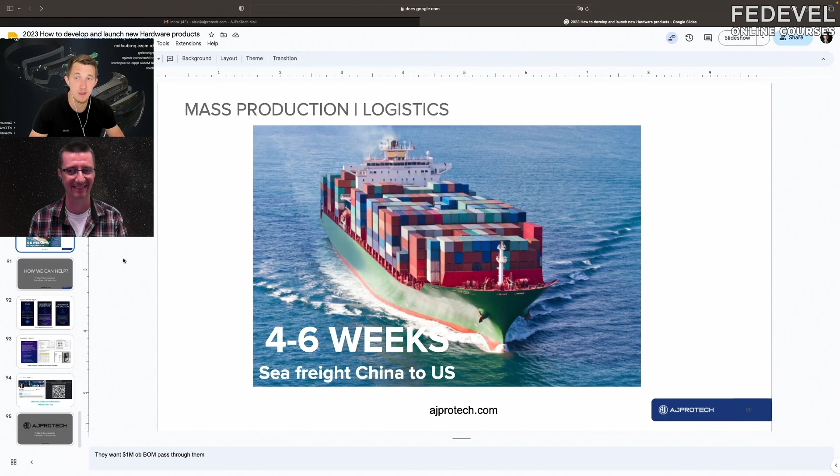So if you come up to this phase, congratulations, you officially made it. Right now you have a product in your own country and can start selling it. Just know it's never an ending process - you'll have to do some modifications, sometimes a component goes out of stock and you have to replace it, and there are quality issues you have to fix. But congrats, coming all the way to this phase is an achievement by itself.

And even if it's your first or your 100th product, it's always exciting. All these months and months of waiting are worth it once you see a product somewhere on a shelf and someone actually using it. This is an amazing feeling.

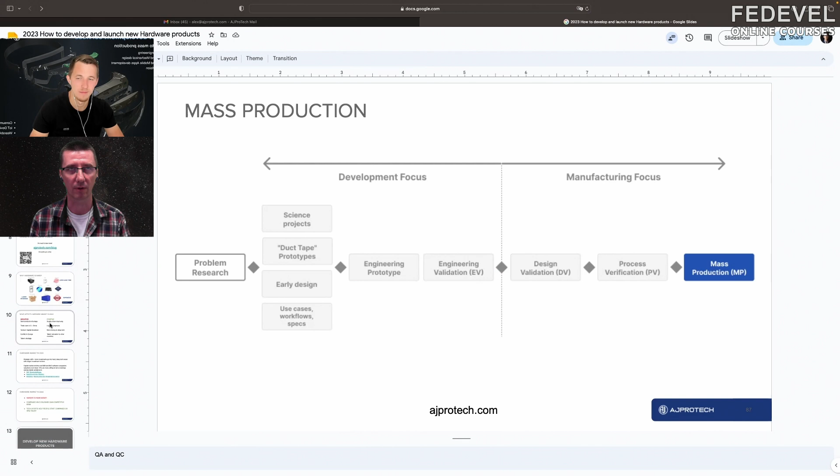I really hope we didn't disappoint some people like, oh, it's so complicated, so much work - no, this is reality. It had to be explained, because this is exactly what I see: many people who are thinking about making and selling a product have no idea something like this is happening, and they really underestimate the cost and time of designing a real product.

Just a last comment on the hardware market overview this year, on how the industry is experiencing what's going on. The semiconductor shortage is still there, some components are still not available, but it's getting better, so supply chain is slightly improving. Trade wars between US and China are definitely picking up, so a lot of our clients are trying to manufacture their products elsewhere, anywhere but China.

Venture capital slowdown makes it harder to raise money for startups, but on the flip side, more money is going to deep tech. Hardware is considered deep tech because it takes more time and more resources. So it's harder to raise money, but if you're able to raise money and work in an exciting area, you might be lucky and get some good talent.

The conflict in Europe is definitely playing a big role in uncertainty. A lot of developers in Eastern European countries are having a hard time working right now, so it's definitely a big downside for the industry. There's also an entire talent shortage - surprisingly, after COVID, some people stopped working, some changed roles, so there's a shortage of people. On the flip side, some countries are beneficiaries of that - talent from Eastern Europe is moving to other countries, creating a surplus of talent there, and countries that never launched any hardware products are now seeing a surplus of experienced engineers who can create amazing products.

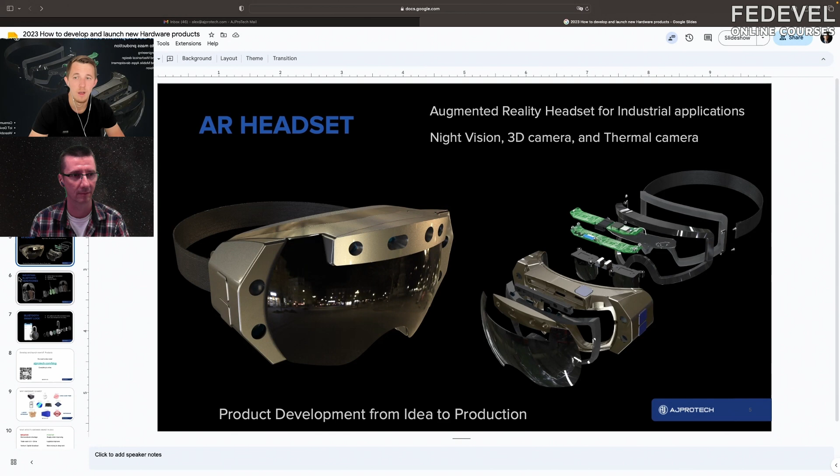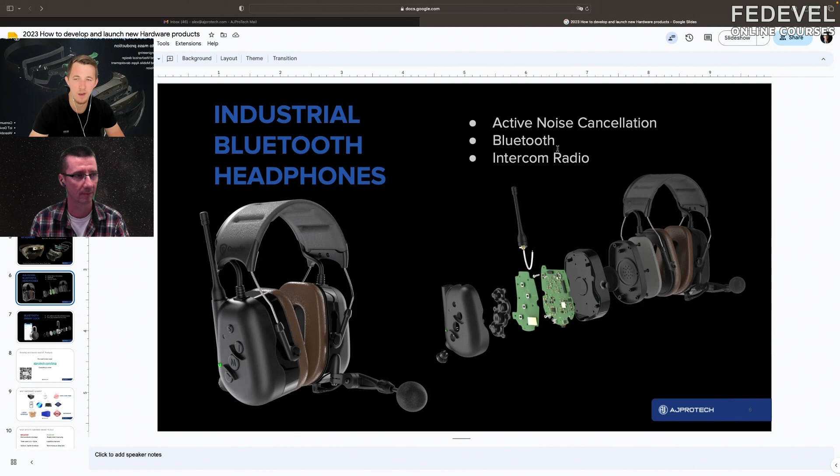These are a few examples of the products we're going to be referring to over the course of this presentation. This is the AR headset we developed for industrial applications with night vision, 3D camera, thermal camera - think about HoloLens, it was actually developed to be a competitor for HoloLens in one of the government contracts. Another one is industrial headphones for construction workers with active noise cancellation, Bluetooth, intercom radio - one of the first big products we've done as a team. And the last one is a Bluetooth smart lock that uses your smartphone to open and close your lock.

So we have seen some of these in the slide already. Okay, thank you very much, Alex.

This was interesting, and I really hope this information will help some people and find it useful. Yeah, it's exciting to share - there's not that much information available online. When I was just getting started, I was trying to find a place where I could read all of this, but it wasn't available, so it took us a couple of years to gather all the information and present it in this 100-slide presentation.